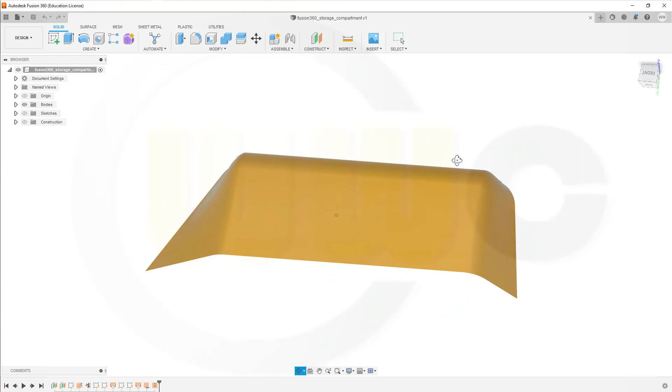I want to do that storage compartment exercise, which is usually a nice little exercise for 3D wireframe geometry. But as Fusion has no dedicated 3D wireframe tools, I will have to do it with 2D sketches and maybe put in some 3D elements as well.

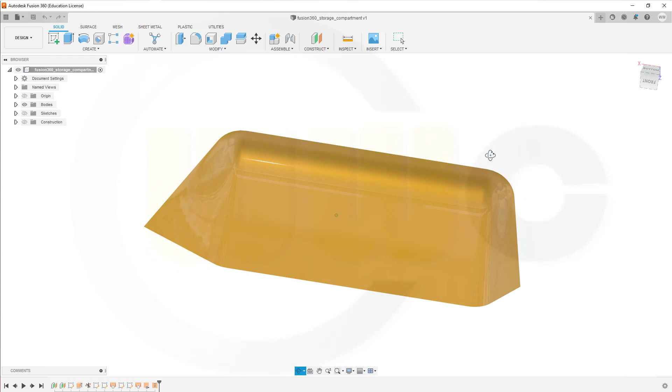So let's take a look at the drawing. Here it is, and you could make a screenshot of it so you could follow that exercise step by step. If that 30-degree angle is on this side or the 10-degree angle on that side, that doesn't really matter. Do it like you want to do it.

Now, let's have fun with Fusion 360.

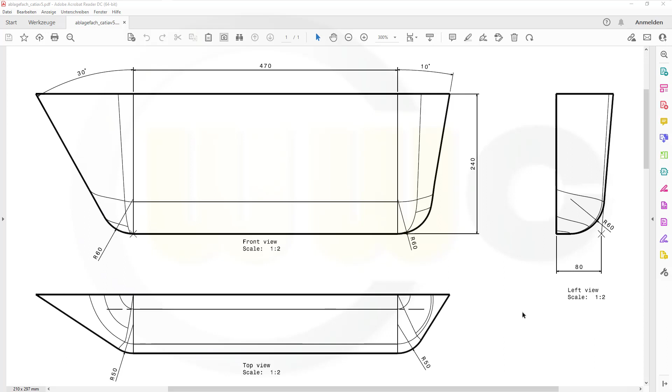Now, let's create two planes first. Go for Construct, select that plane, and the offset should be 470. Then another one with an offset from this plane, and that offset might be 240.

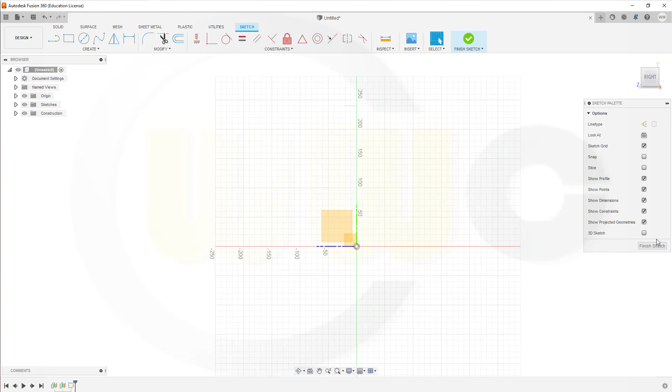So in order to do a 3D sketch in Fusion 360, you have to select a plane anyway. So I could do that sketch on the plane, and maybe drop in some small 3D elements on the way. Let's start a sketch, but now on this plane here, yes, and it's not a 3D sketch.

I need a line, maybe like this. You could already give it a dimension if you want. So let's go for 80.

Then another line which goes up, and I need to bring in that plane here. So go for, where is it, Project Include, Project or Intersect. Select it here, confirm, and then put this point coincident on the plane.

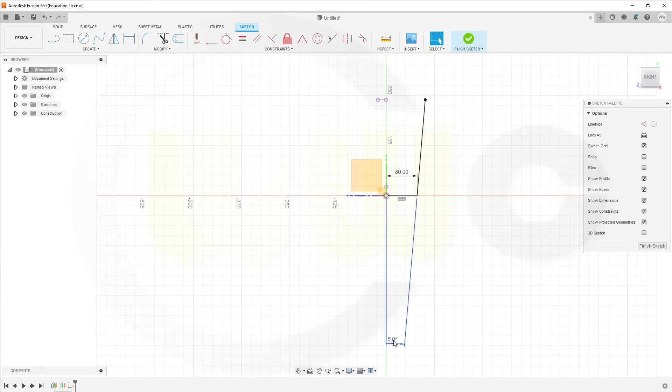Let's add an angle if possible. So that should be between this axis and that line, and that should be 5 degrees. Move this up so it's better visible.

Now let's add a fillet from this one to that one, and the dimension should be 60 millimeters. Finish that sketch, and now let's make a surface extrude.

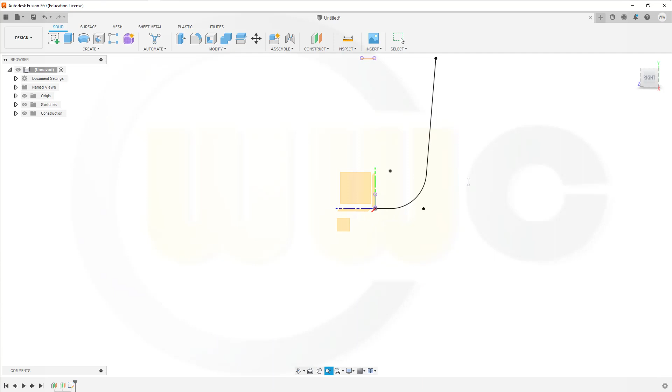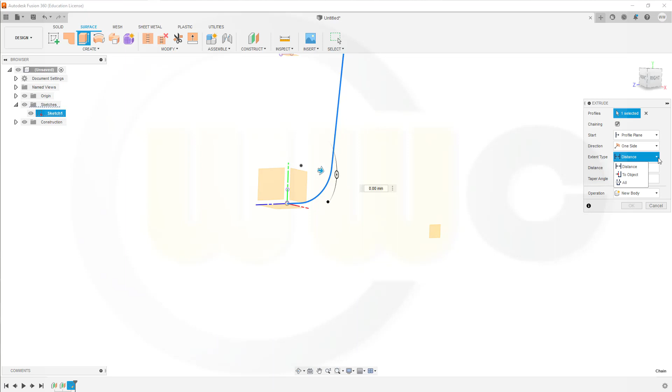Go to Surface, make an extrude, select that sketch here, this one, which is obviously not really possible, so let's select it here, and that should go up to an object, and that object would be this plane here. Confirm.

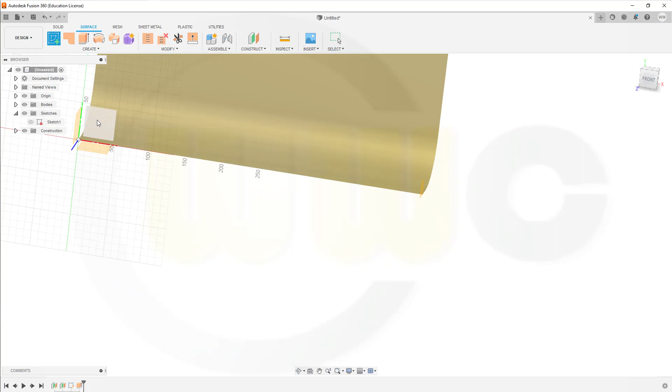Okay, let's go for another sketch on the XY plane here. So sketch right there, and I wanted to do it similar to how I did it with the 3D tools in the other programs.

So I went for an arc there, so I will go for an arc here. Let's use a 3-point arc, and that should start here, go over there, and maybe like this.

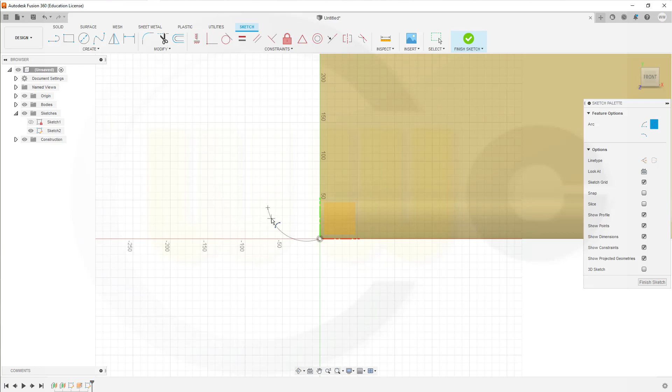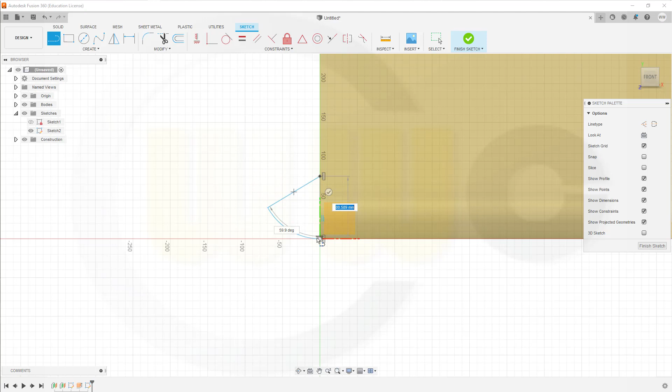Now, in order to align it, I did it with a vertical constraint like that, and then here I have to add 2 construction lines in order to dimension the angle of that arc. So this should be for construction only, and that one here as well.

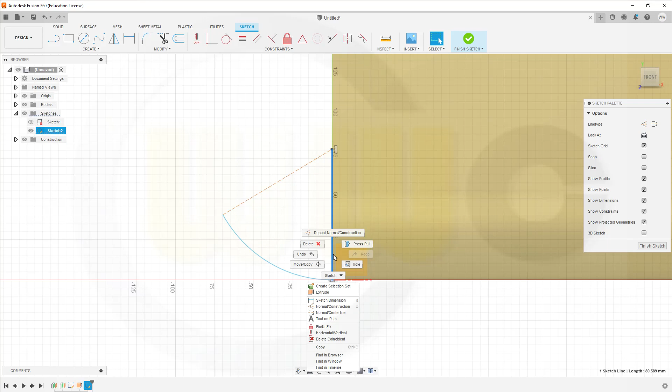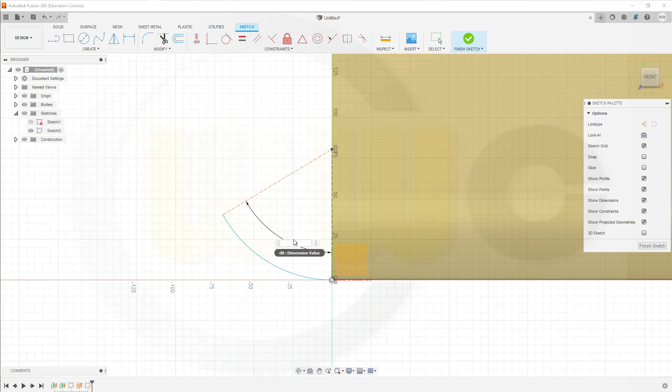Now we have to add a line which starts here, goes up to the plane. Therefore we have to bring in that plane again.

So go for Project Include, Project. That's the plane here. Confirm. Now put that point coincident onto that projected line here. And then we need to add an angle between this one and maybe that line here, or the plane, doesn't really matter. In this case this would be 10.

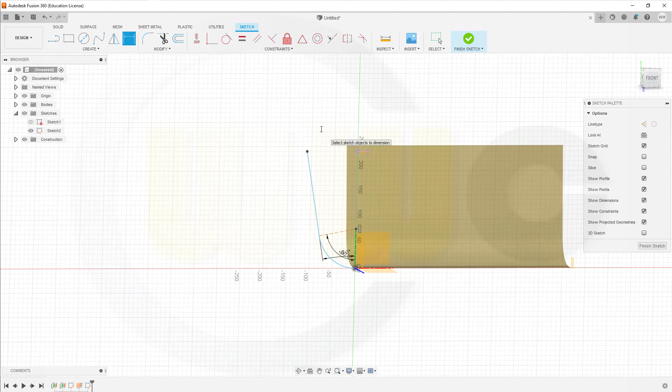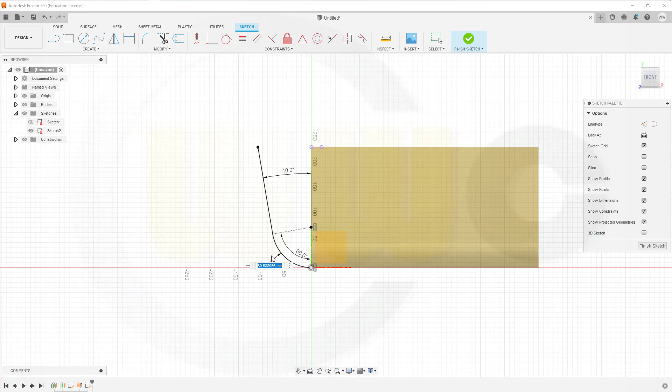Okay, finish that sketch. I've just noticed that this sketch isn't fully defined. Maybe I forgot to dimension that radius. So go into that sketch and add, yeah, it's missing that dimension. This should be 60 millimeter. No, it's fully constrained. Finish that sketch.

Now the next sketch should be on this plane here. So go for sketch, right on that plane. I will need that point inside my sketch, so let's go for Create, Project Include, Project this point into the sketch.

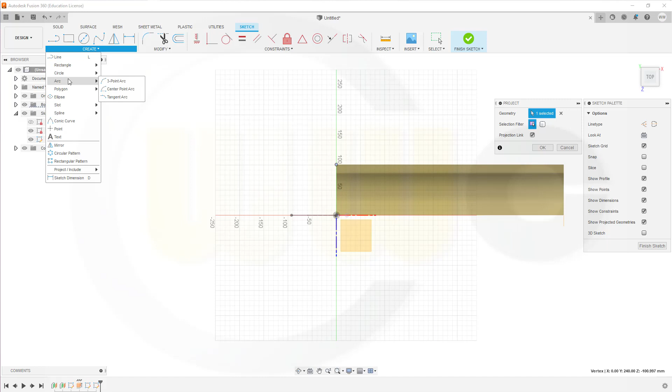Now I can add an arc, 3 point, yes, maybe like that. Now let's constrain it: this point and that point should be vertically aligned, and that dimension should be 50 millimeters.

Let's move this a little bit, and now I would need a line from this point to that one. So I could activate 3D sketch, then I don't have to project that, so I can draw a line from this point to that point.

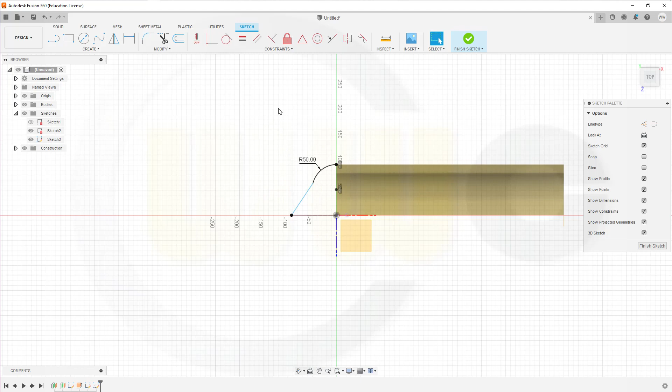And now I could deactivate this, but I need a tangency here, tangency constraint, so go for tangency, select it, and it should be fully constrained, and finish that sketch.

And now we can do our first loft surface. So let's go for the loft surface. There you go. The first profile should be that sketch here, that would be, I think, sketch 2.

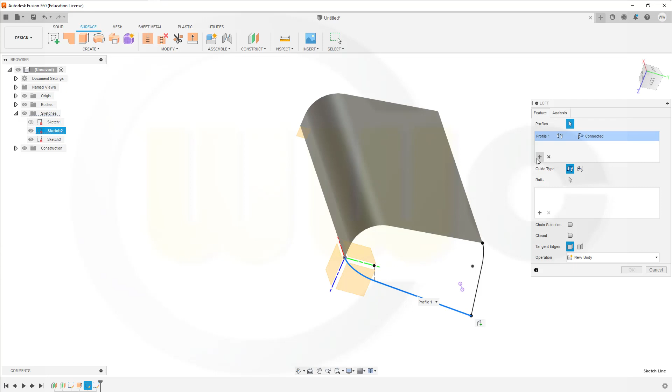You can't select it here, obviously it doesn't work, so you have to select it here like this. Then go for another one and add this edge here, that edge, and this edge down below, like that. And of course it should be not connected but tangent to that surface.

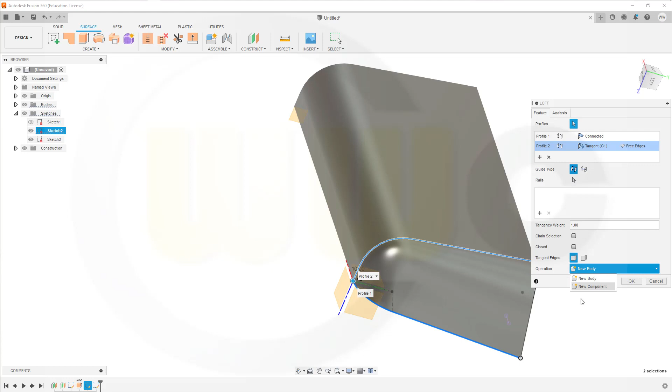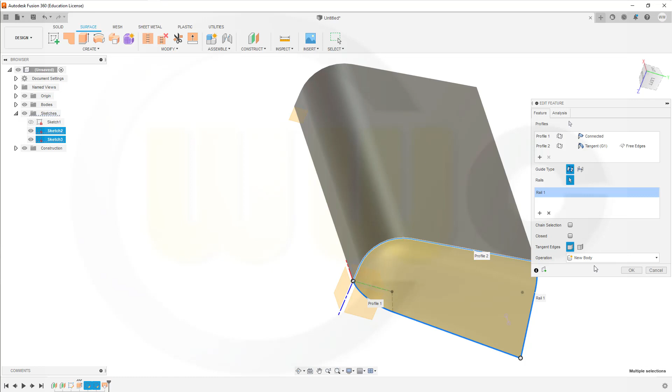We can make a new body, or we just could, no, we can only go for a new body. Okay, and confirm. But again, I forgot something. You have to add a guide, so activate it and go for a guide or a rail in this case, and that would be this one here, and add the second one as well. Now confirm. Now we have to reverse the normal, so let's modify reverse normal from this surface here and confirm.

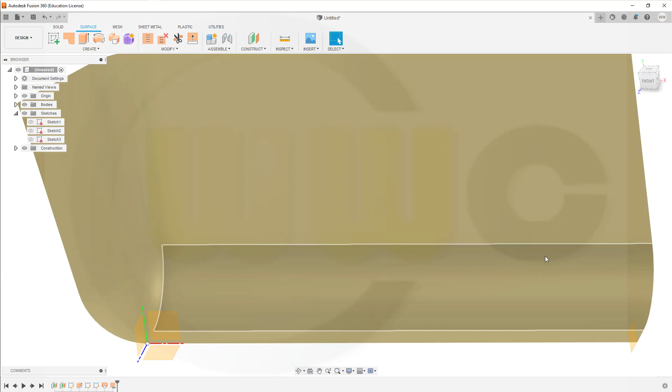And that looks okay. Now I need 2 more sketches, and I want to do it in a more efficient way. So next sketch is on this plane here.

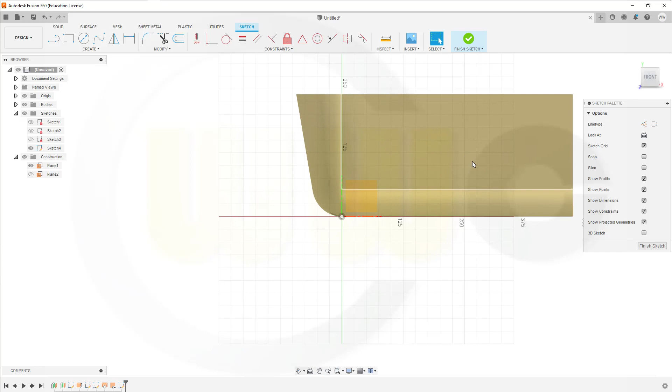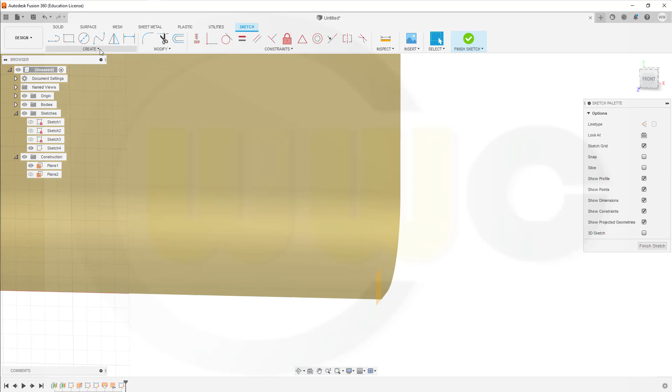I need that point inside my sketch, or I could do that edge as well. So go for create, project include, project this point here. Yeah, it's inside, hopefully. No, that's the wrong one. So let's go for the correct one. This one here, that's more like it. And confirm. Now I can use a circle.

Diameter should be 120. And those 2 points should be aligned vertical. And of course the projected point should be on that circle as well. No, not with this one, but this point should be right there.

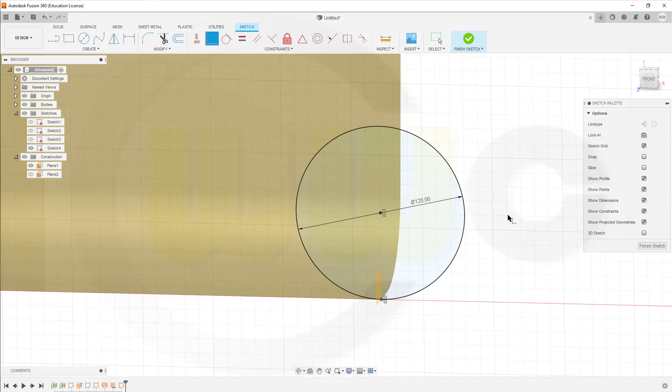Okay, then I need a line which starts somewhere on this circle and goes up, and I will need to include or project that upper plane, which is this one. No. Project this one here and confirm over here, and now this point should be coincident on that projection.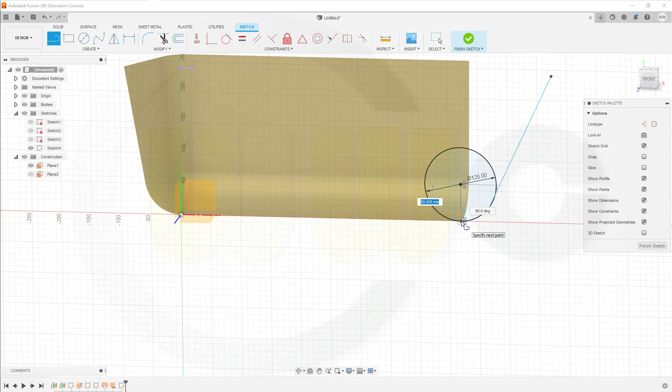Now add a dimension. That dimension should be between this one and maybe if we can select something over here. Not really possible, so I could draw a construction line from this point to that one. Does it snap? I hope. Select it, make it a construction line. No, that's really annoying. Construction. Okay, now we can add a dimension between those two.

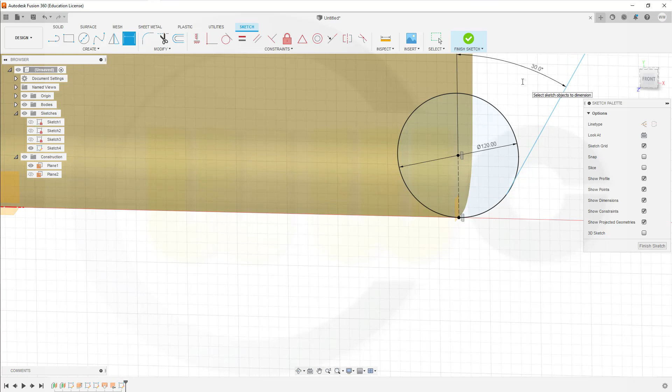And that should be 30 degrees. And of course, I need a tangency constraint between the circle and that line. Now we can trim, so this should be removed. And finish that sketch.

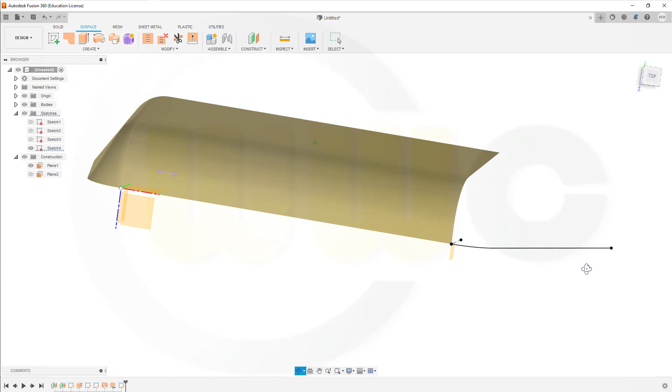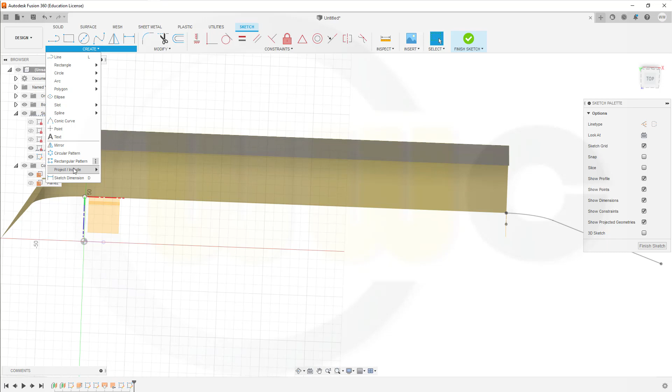Okay, next sketch is on that top plane, which is still hidden, so let's bring it into view. Go for another sketch now on this one. And again, I will need to project a point, at least a point, into my sketch. So go create, project / include, project this upper end point here, confirm.

Now we can do another circle. That circle has a diameter of 100. Again, I could arrange it like that. So go for vertical constraint here between this point and that point. Yes. And of course, this point should be on that circle.

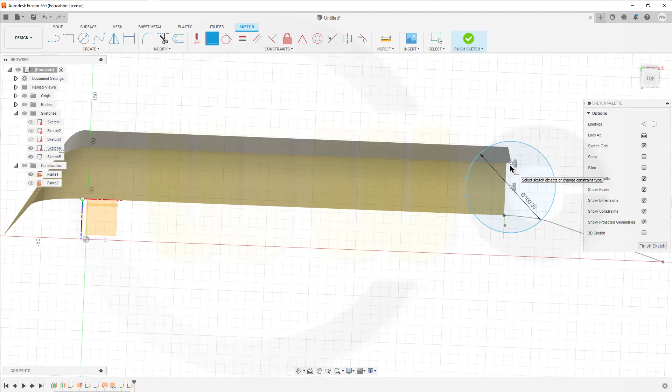Again, I will need a line, and I could do it again with the 3D line or just with a simple line. If I go for 3D lines, I go for a 3D sketch. Select the line, select this point, go to that circle. Okay, now we could deactivate this, and I will need, of course, a tangency constraint here.

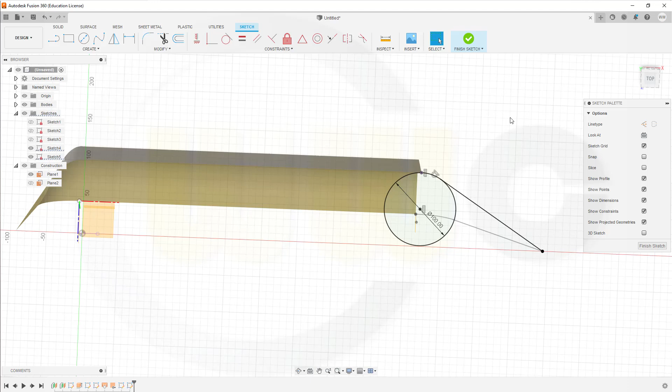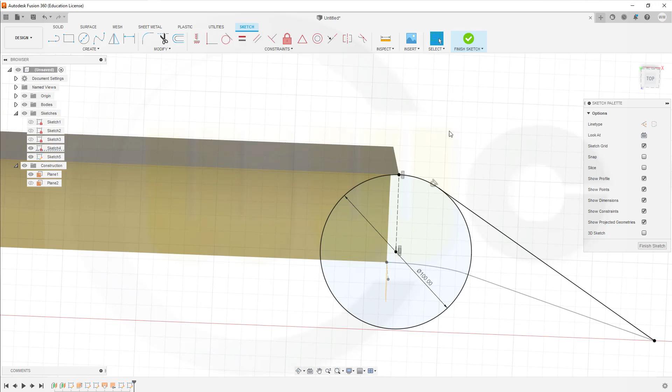Now we can trim, so this should be removed. So obviously that point was not there, so let's bring it back. So this point has to be on that circle. Okay, let's add a construction line, like this, make this one for construction only. Okay, and now I should be able to trim this. Yes.

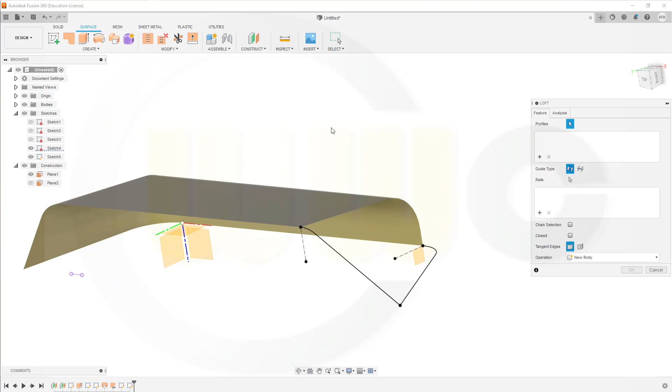Finish that sketch, and now we can do our second loft surface. So go for the loft, select this one, that one, plus the edges here, and add the rail or guide like that. Again, it's a new body, and confirm.

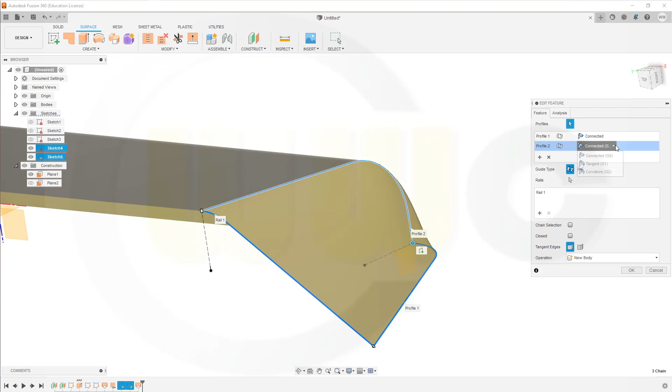But again, I forgot something. I want it to be tangent like this, and now confirm. Reverse the normal of this surface and confirm.

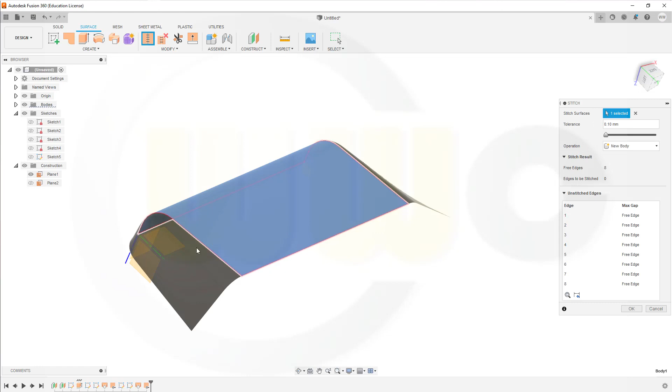And now we can sew or knit or whatever it's called in Fusion. This one here, it's called stitch. I want to stitch those three surfaces together. Confirm, and I'm done. So hope it was still helpful.